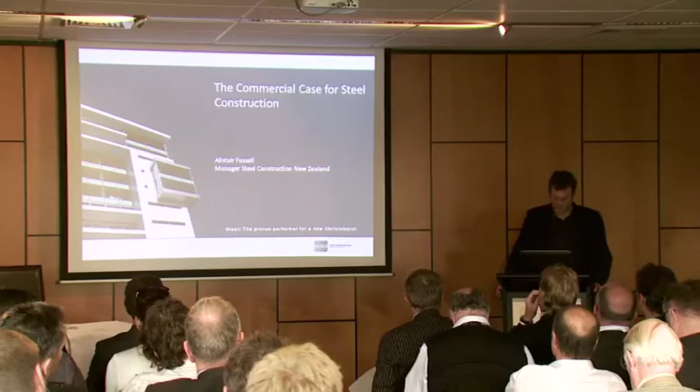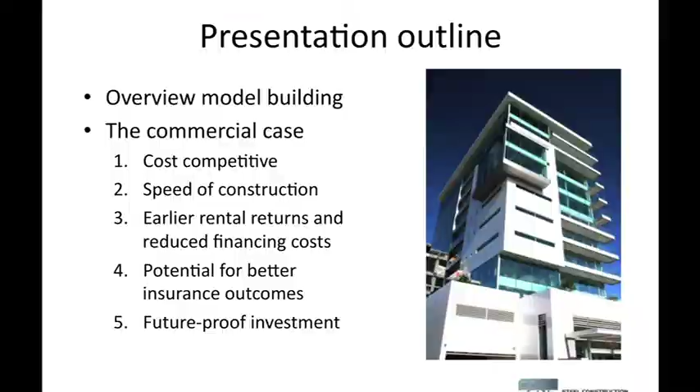This is just to give you a little bit of an outline of where we're going to go in the next 20 minutes. I firstly want to quickly overview a model comparison study that we commissioned some design and construction professionals to undertake on our behalf. They produced a model building, and in this model building they did some cost studies, some construction studies. We wanted to come up with some hard data so we could make comparisons between the financial merits of various types of systems, and I'll thread some of those figures through my presentation. In terms of the commercial case for steel construction, I'll be looking at it under 5 key commercial considerations, and we'll just knock them off one at a time. So that's where we're heading.

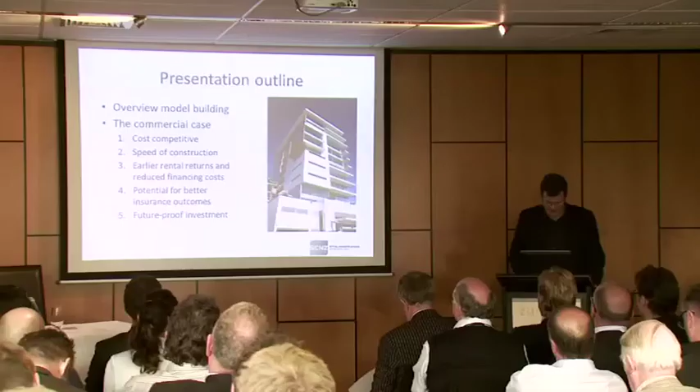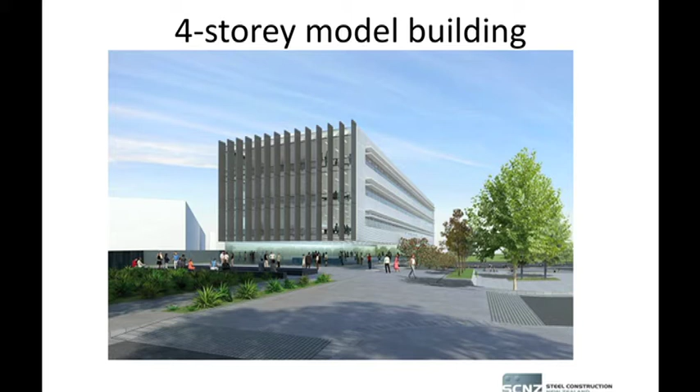We approached Auckland-based architects, Architectus, and said to them, our brief is we want you to develop a low-rise building, probably about 4 stories. We'd like it to meet the current commercial market for a mixed-use building, primarily office space, and perhaps on the lower floor you might put in retail. This building is about 70 metres long by 18 metres wide, so about 1,300 square metres, and it would fit with the Christchurch City Council's vision and the Central City Plan for a low-rise rebuild of Christchurch.

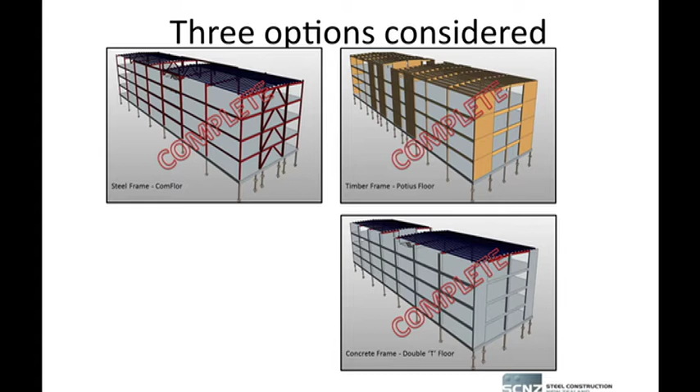We then approached engineers Aurecon, with Sean Gledhill as project leader, to look at putting some structural solutions into this building. We had steel solutions, timber solutions and concrete solutions put into this building, and they're supported on screw piles - something you'll see a bit more of in Christchurch, suited to use in low-rise, lightweight construction.

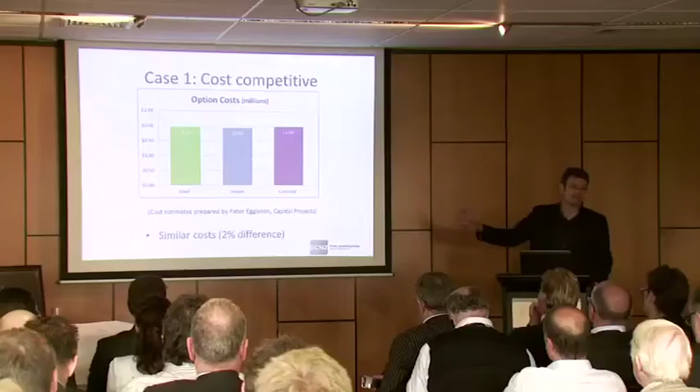Just to understand what that cost represents, it's just the cost of the foundations and the superstructure - not fit out, cladding, roofing, which we figured was the same for all of them so it wasn't considered. So that's just your structural costs. Timber came in lowest at $1.95 million, about $10,000 difference to the steel solution, and slightly more to the concrete. But there was only really a 2% difference across it. So you can get the seismic resilient benefits of structural steel solutions without having to pay a premium to have them.

The second commercial consideration around steel construction is that it's a very fast form of construction. As the Minister has alluded to, things have changed from probably 30 years ago, where you would regularly see welders and sparks from people welding on sites. We certainly don't do that anymore.

It's much more efficient if we do all the complex manufacturing operations in the controlled environment of a workshop - much easier for welders to do it, much easier for engineers and inspectors to come in and see what's going on. And so that's primarily what you see with steel construction.

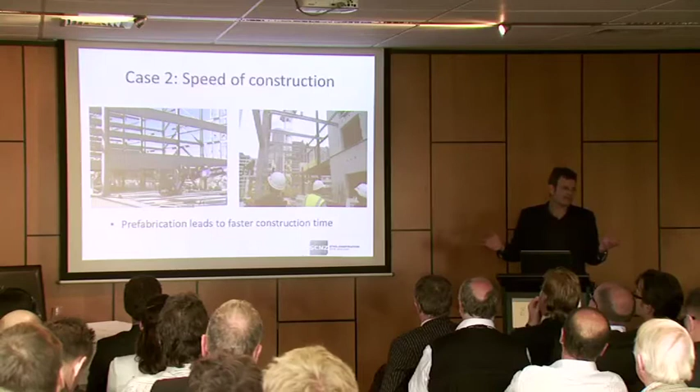You can see examples over here. Essentially, you get simple stick-fabricated components that come to site and go together like a big Meccano set. You'll see there's cleats and bolts in there, and generally you'll find that you require very small rigging crews.

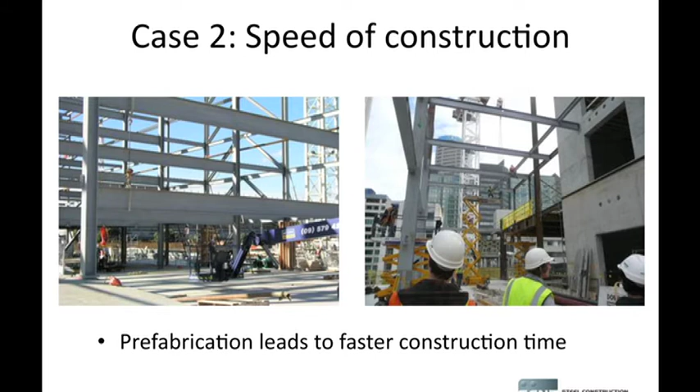You probably can't see, but this was a 20-plus story building in Auckland, the new ANZ building on Queen Street. There were actually 2 guys rigging it, plus a guy on the crane, and that would have been the size of the crew they would have used for that building. It doesn't take many people to actually rig these buildings.

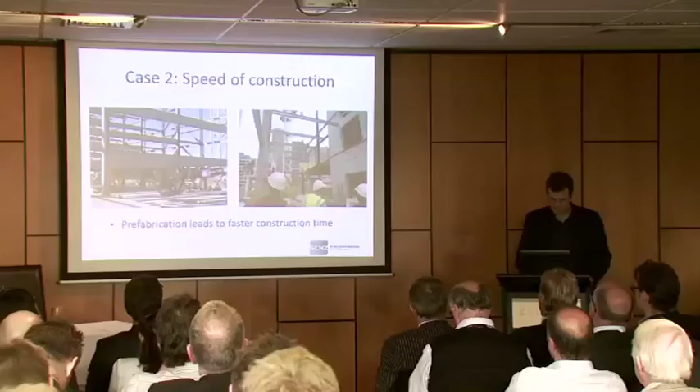As a rule of thumb, and we've got this from one of the local builders, and we've found this with our own studies, structural steel buildings are generally 10 to 15% faster if you look at the overall construction program compared to a concrete alternative. So it's a very fast form of construction.

Now, we've actually had help from Mainzeal, who helped us look at the construction aspects of this project, and they have a very smart building information modelling manager in their Auckland office. They're getting into BIM technology, and he's put together a clever animated sequence showing how these buildings go together. So rather than putting up the old bland bar charts you often see for construction programs, he's produced an animated sequence, and I'm hopeful it'll actually work.

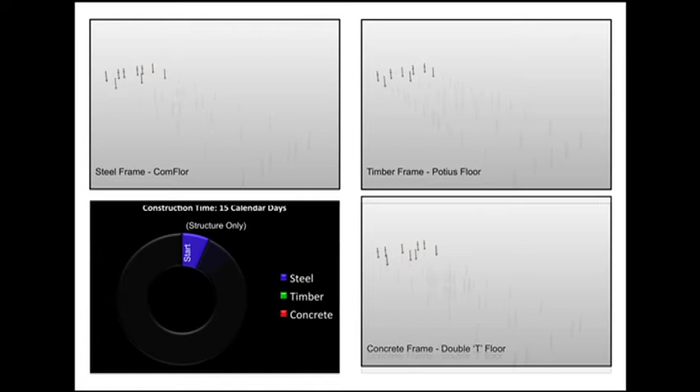It really just shows the difference in the speed of construction. Oh, there it goes, it's starting to work now. So this building's being built - you've got your foundations, your ground beams going in, and now the various floor systems are going in. And we're going to find the first milestone we strike in this project, which is the completion of the structural steel solution.

Just in terms of background to this animation sequence, when they did the construction programming for this job, they assumed it was a design-build contract. They assumed all the design documentation, the consenting, all those things would take the same length of time. So you'd see they all started essentially with the piles going in at the same time, so that's your first stage.

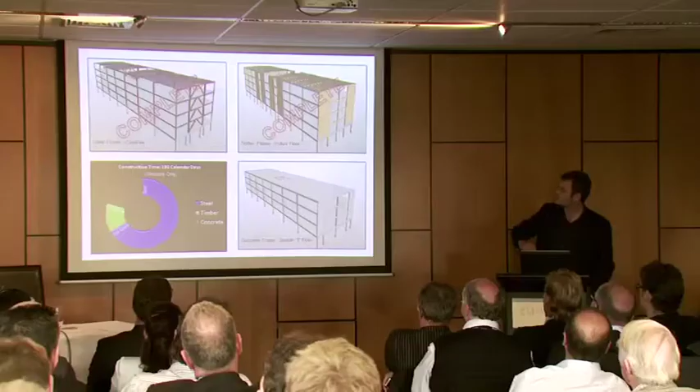So the timber structure is pretty well advanced, but still hasn't got the concrete floor in, still got to put the roof on. For the concrete one, you've still got the floor to put on, so now we'll let this run. About 25 days later, we get the timber structures all ready, ready to be made watertight. For the concrete structure, you've still got to put the roof structure on it. We'll let it run its course, and I'm very impressed that it's actually worked.

And there you have it, hey presto. So if only it was this easy to rebuild Christchurch.

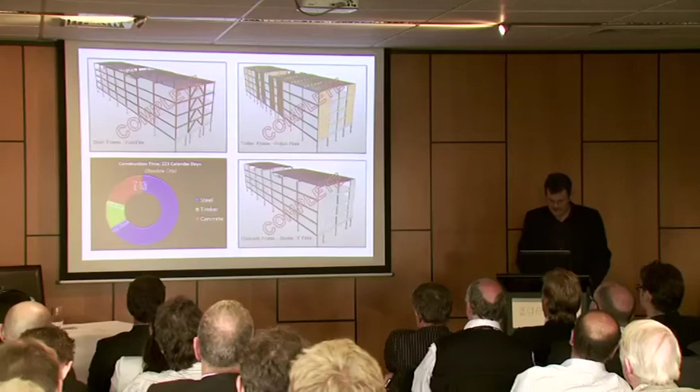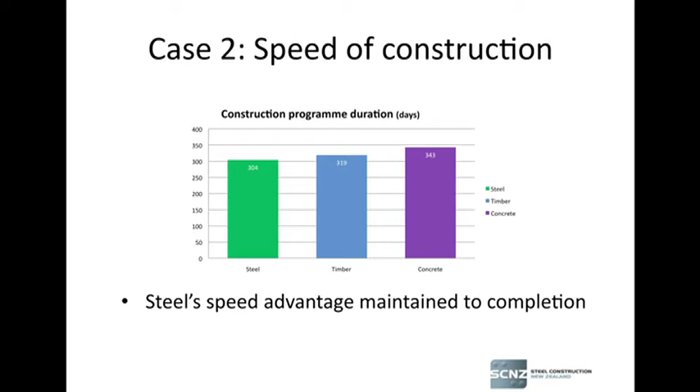As you can see, 304 days was the duration for the contract for the steel building, 319 for the timber. So we're essentially saying if it's 15 working days, it's about 3 weeks. Then 343 days for the concrete option, so that's about 39 days or just under 8 weeks difference. And that rule of thumb of about 10 to 15%, in this particular project the steel structure was about 12%, so it fits within that range.

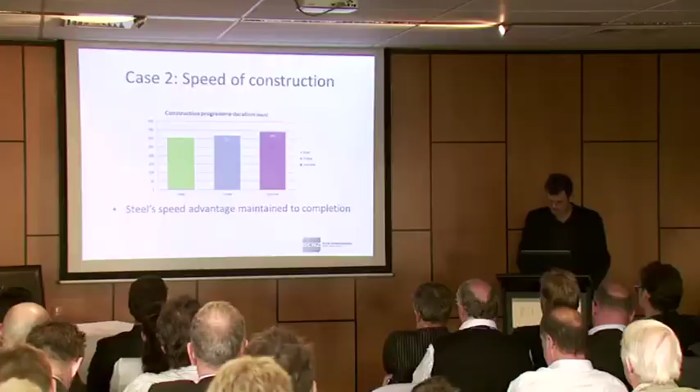Well, someone asked the question, so what? If you build your building faster, is there any real value in it? Certainly if you listen to the news coming out of Christchurch, there are people in the local business community who think it would be good if you could get some of your key building stock back in the city, particularly around hotels at the moment. You're significantly down on hotel accommodation.

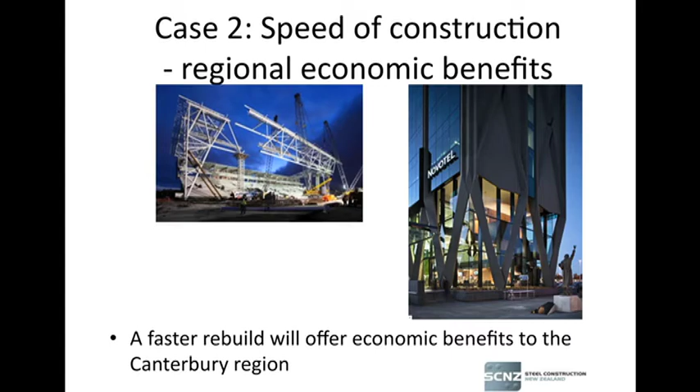You're certainly in need of stadiums, events, conference centres and the like. So certainly from the perspective of the overall economic benefits to the Canterbury region, there will certainly be benefits in seeing some of those built quicker. You probably heard recently there's a whole lot of conjecture about how quickly the office CBD rebuild is going to happen, and there's thinking that maybe it won't happen for a while.

Interestingly, it will be good for the Canterbury region if even some buildings get started with this. There's research from the UK on efficient building design that found the design of your office has a big impact on worker productivity. I imagine some of you in Christchurch are working in less than ideal offices right now. I visited engineers in town who were crammed into what was basically a two-story flat. Research shows that good office design can improve productivity by 3 to 20%. So if you get people out of some old buildings and into new ones, it'll probably help as well.

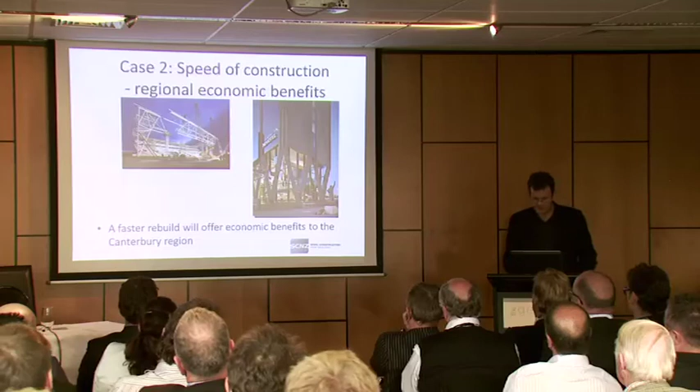That's really on the regional level, but taking it down to a level of more interest to the property developers and building owners here, the next slide zeroes in on the benefit of building quicker from a developer or owner's perspective. You probably can't see these figures well, but there's a document in the material left at your seat with a closer look at the figures. The third commercial consideration for steel construction is that you get earlier rental income streams and reduced financing costs.

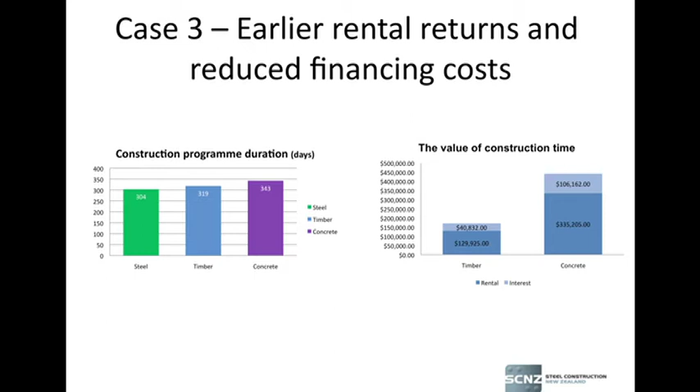We've done some simple mathematics using commercial property data from a Colliers International report for the Christchurch City Council, which was in the appendices of the Central City Plan, giving nice figures on Christchurch rentals. We calculated the weekly rental value for our building, which has about 1,170 square metres per floor of net leasable area, across 4 floors — 3 floors of offices and 1 floor of retail.

For this particular building, the rental income is about $43,000 a week. Looking at financing costs, assuming the developer uses bridging finance for the whole project, and using the Colliers International methodology for interest rates, that's worth about $13,500 a week in interest to the developer. You don't need to be an Einstein to see the difference: getting in 3 weeks earlier, comparing steel to timber, means about $130,000 extra income in the building owner's pocket, and the developer saves about $40,000 in interest costs.

It gets even better comparing with the concrete option — you're dealing with nearly 8 weeks difference. Now you're talking about rental income of about $335,000 extra dollars, and bridging finance savings of just over $100,000. So the difference in terms of the value of construction time can be quite significant.

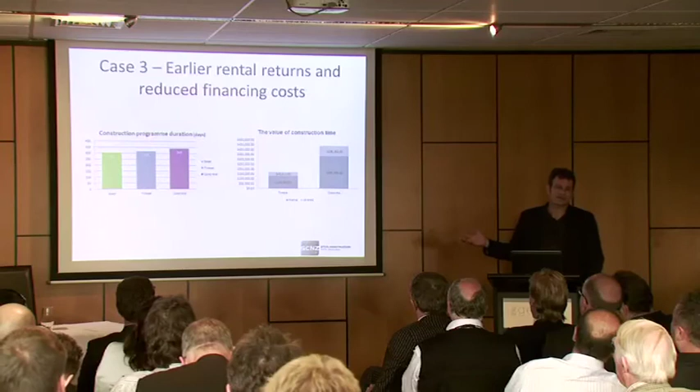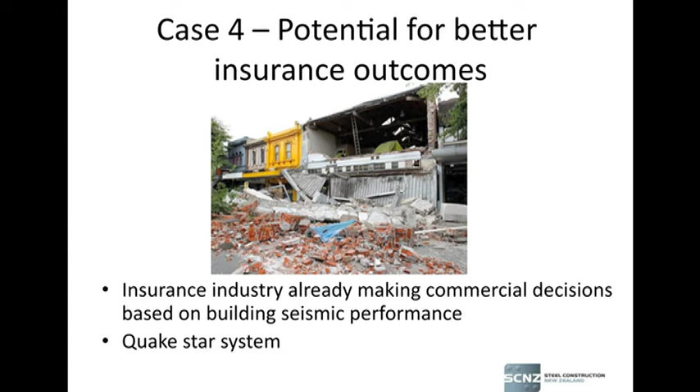The fourth financial consideration for steel construction is that when you use resilient materials like structural steel, there's potential for better insurance outcomes. If you read the newspaper, you don't have to look hard to find articles about the soaring cost of insurance in New Zealand. The insurance industry is already looking at expected seismic performance of buildings to inform their commercial decisions, and we've experienced a huge increase in insurance premiums. Essentially, what they've done — probably a crude approach, or the best they can manage right now — is treat buildings built before 1976, which is considered the time when seismic design provisions started getting more modern, as the cutoff point.

Anything before that, your buildings are going to attract a much higher increase in your insurance premiums, and if your building was built before 1936, you're probably going to find it quite difficult to even insure the building.

One thing that's happened in the wake of all the economic damage caused by the Christchurch earthquakes and sequence of events has been a call to set up a seismic rating system, intended to communicate to non-engineers and non-technical people the seismic risk associated with different types of construction. There's a New Zealand system being proposed at the moment, and we've got one of the proponents of that system who's going to be on our panel discussion tonight.

That system is really based on a North American model, and essentially that rating system considers 3 key performance indicators for the seismic performance of a building, rating them from 1 to 5. It looks at life safety - we're well aware of that, and we've seen it in Christchurch, that generally our standards have dealt well with that. But the other two issues, repair costs, we haven't done so well. They rate whether you'd expect the building to suffer more than 5% or 10% of its value in damage. The last one is time to regain function of the building - is it a matter of days, weeks, months, or maybe years?

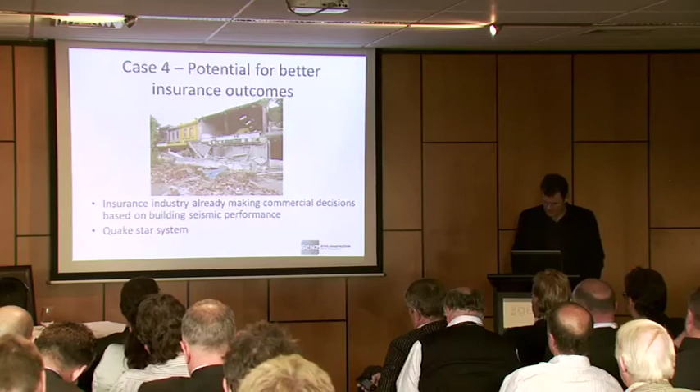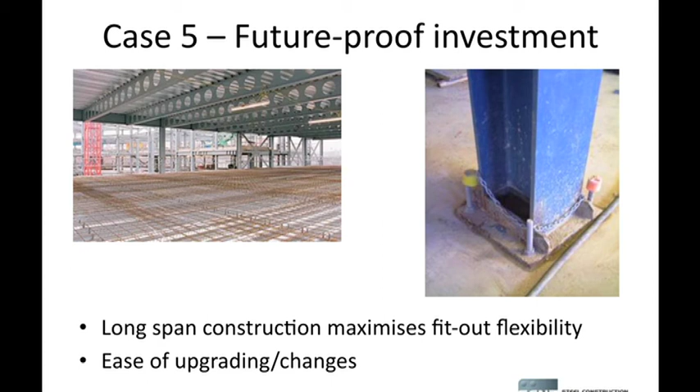And the final commercial case for structural steel construction is that it's actually a very good system for future-proofing your investment. Nothing erodes the commercial value and rental returns from a building like finding that your building is obsolete for the property market requirements, or that with changes in the building code seismic requirements, you suddenly find your building has a lot of deficiencies, and unless it can be cost effectively upgraded to meet the market, you really stand to lose a lot of money.

And the good story for structural steel, as Charles has already talked about, is long span construction. You can cost effectively produce clear spans of up to 25 metres, giving you very open plan floors. This means that when future tenants want to come in and maximise the flexibility for your office, it's a good option.

The other thing with structural steel is that you can actually upgrade or change your buildings more easily than other materials. For example, there was a building at Waikato Hospital - this probably wouldn't go down as a necessarily good way to procure buildings, but there was an emergency department building well through construction when a decision was made to add a couple of extra stories, so the project ground to a halt as everybody figured out what that meant for the structure. A lot of steelwork had already gone up.

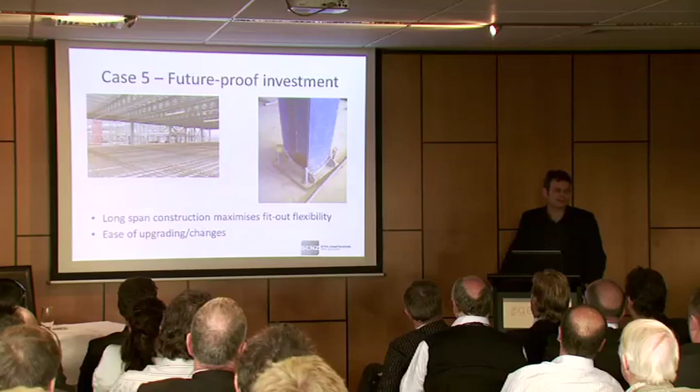Some of the steelwork could be taken back to the workshop to be strengthened. Other bits had to stay on site, and they repaired or strengthened it in place. The job carried on, and it's now finished with 2 extra floors on it. So you can actually modify and upgrade these buildings. In terms of seismic upgrades with steel buildings, you can get braces into them and strengthen the connections, so they're certainly a good way of future-proofing your investment.

So that's really, I guess, the 5 key commercial considerations for structural steel construction.